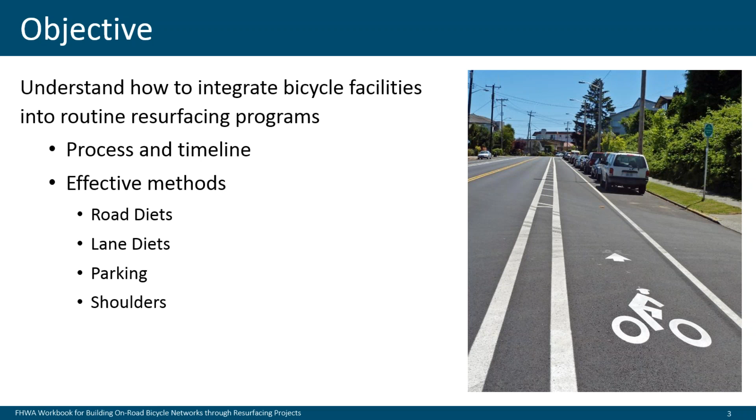In terms of the overall objective for our time today, we want to really get an understanding of how to integrate bicycle facilities into routine resurfacing programs. As was mentioned, quite often we don't always have funds to put in bike facilities as special projects. But whenever you do repavement, there's an opportunity to get bicycle facilities in simply because you have to do the restriping. So there's a couple different things we'll talk about today. I'm going to be focusing on the process and timeline, and then Jeremy will be talking about effective methods for actually implementing these different kinds of bike facilities.

So here's the agenda: the resurfacing process and timelines, which I'll cover. Jeremy will cover road diets and other methods for including bikeways, and then we're going to touch on cost and material considerations. I want to refer you to the lollipops on the right side, which works really well when we have in-person workshops. What I like to do is suggest you think of when you were 11 years old, and think of where you lived at that time. Were you allowed to walk alone and go to the grocery store or wherever and get a lollipop and come home alone?

Was that something you were able to experience as a child, around age 11? Now jump forward, and assume right now, wherever you live, that you have an 11-year-old. Would you allow your 11-year-old to walk to the store to get a lollipop, walking alone?

Quite often when I ask people to raise their hands, we find there's a real loss of kids' ability to navigate their neighborhoods and go to the store on their own. So it's a way of bringing home the importance of creating both bikeable and walkable communities. Think about it - does it pass the lollipop test?

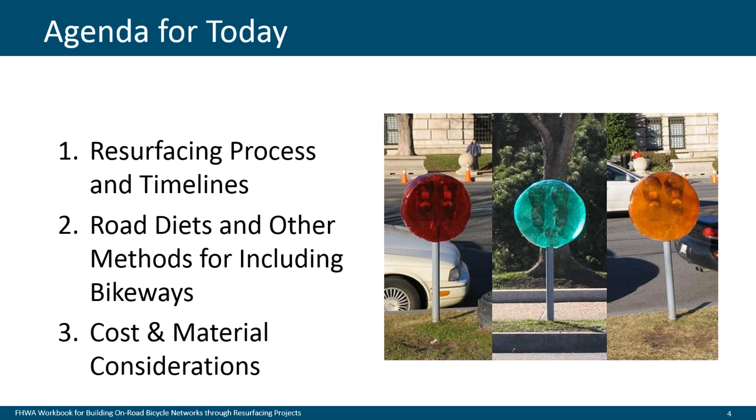So I'm going to talk about the process and timeline. In some ways, I think this is the most difficult part. We have a lot of good guidance on design and how to do things, and that's very important. But the process and timeline can be particularly challenging, especially since every community has a slightly different way of approaching it.

So we're going to take you through some steps that will hopefully allow you to figure it out for your community, and really start to institutionalize bike projects into resurfacing projects.

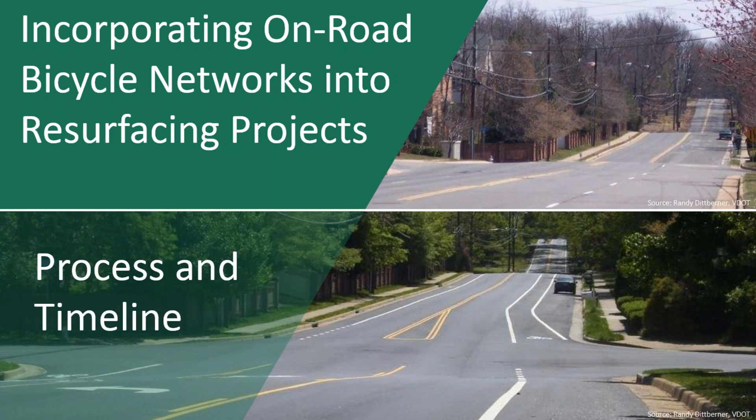Resurfacing defined is always a bit tricky, because there are so many new products out there - overlays, microsurfacing, new materials. So for purposes of our conversation today, we're going to describe resurfacing as anything you do to a street where, when you're done, you've got to repaint the lines. We'll keep it very simple like that.

We're also going to assume that the curbs don't move and the shoulders don't change - curb to curb, whatever's there gets resurfaced, but it means you're going to repaint it. And whenever you repaint a street, there's an opportunity to do something for bicycling.

Every community uses different definitions, and you'll have to provide your own in this. But for this presentation, I'm widely dividing resurfacing into two halves. One is operations and pavement maintenance - these are the annual programs where you typically do overlays and resurface streets. They're called different names, but you get the idea.

Then there are the capital projects - the six-year big capital projects where we're completely rebuilding a street, possibly widening it, maybe building a new street, with a whole different kind of timeline.

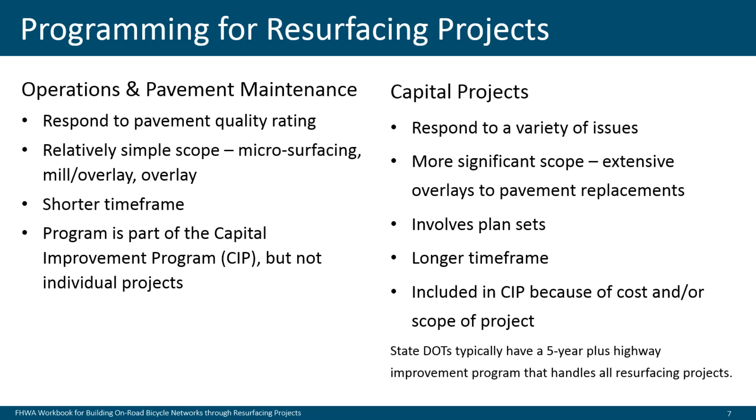We're not talking about capital projects today. Capital projects - we call them CIP, among other names. We're talking more about the operations and pavement maintenance, the things we typically do on an annual basis, putting a new surface on a street.

One thing that always comes up is what triggers ADA. I won't spend a lot of time on ADA this morning, but whenever you're doing a resurfacing through an area where people cross the street, it's going to trigger ADA. You'll have to redo the ramps and make sure you have the companion ramp and that it truly meets ADA requirements.

When communities get in trouble, it's usually because they're not being aggressive enough in meeting ADA requirements, trying to fine-tune what counts as official resurfacing versus what doesn't. Anytime you're putting a resurfacing down, however you define it, and repainting, you're going to trigger ADA. Just assume you're going to do this, and it's going to be part of what you do.

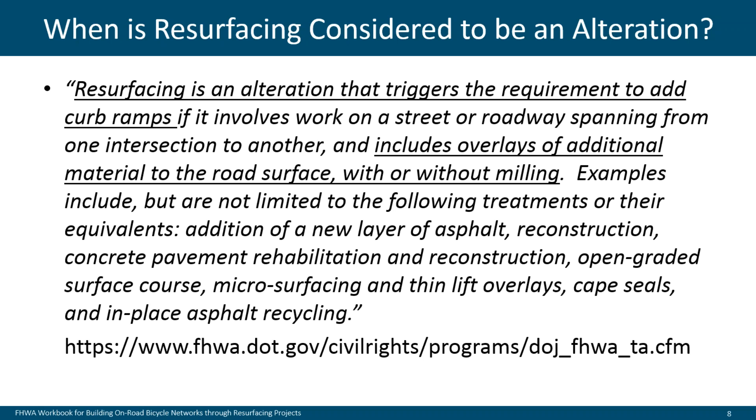So this is a typical process, and whenever I was working on this, whenever you start putting little boxes together and showing a process, you realize it probably doesn't exactly fit for any one community or transportation agency. But I think it gives you a sense of how this is done, and you'll have to adjust your thinking in terms of how your agency does this. But I think it's good for purposes of discussion and the point we're trying to make. So I'm just going to walk through this because I think this is particularly important.

Typically, there's some sort of inventory of road conditions, have some sort of asset management plan where we know the inventory and we'll have that data. A second piece here, the second box, starting on the left side going down, you'll have that information, process the data in some way, and use it to rate the streets. And then the third box is there's going to be a resurfacing list. It could be something that maybe you revise once a year or every couple of years, but at some point there's going to be a list, and there's going to be a number 1, number 2, et cetera, through the list. There may or may not be, you can see the sub box there, some agency review, and then it might get adjusted, and then obviously there's a final list.

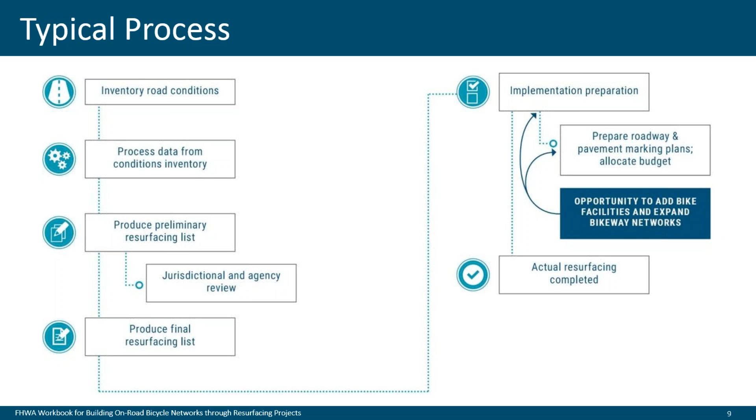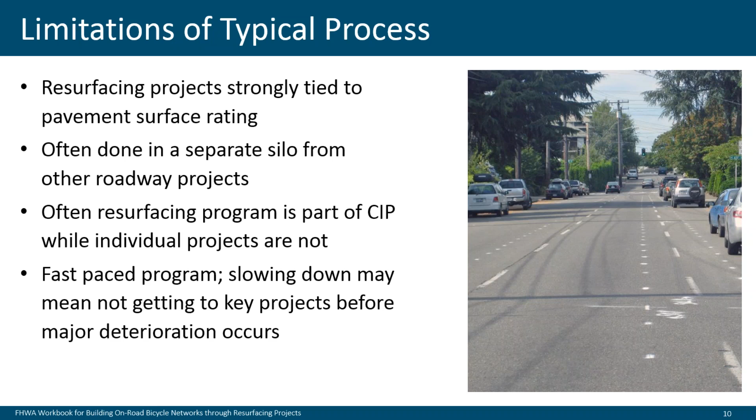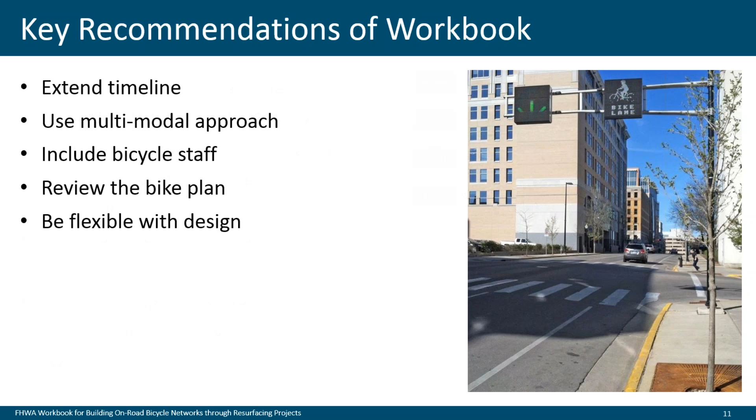So the recommendations of the workbook, and I'll have a slide on each one. We're going to talk about extended timeline, the use of multimodal approach, including bike staff, reviewing the bike plan, and be flexible with design. I'll have a slide on each one of these. So probably the most important

recommendation of the workbook is an extended timeline for the annual resurfacing projects. And what we're recommending is a 2-year cycle instead of a 1-year cycle. Now, obviously, if you move from a 1-year cycle to a 2-year cycle, the transition year, you're probably not going to put as much pavement down that first year. But once you're into the 2-year cycle, then obviously you do as much as before. And what this allows for is to involve the public. I'll talk a little bit more about that.

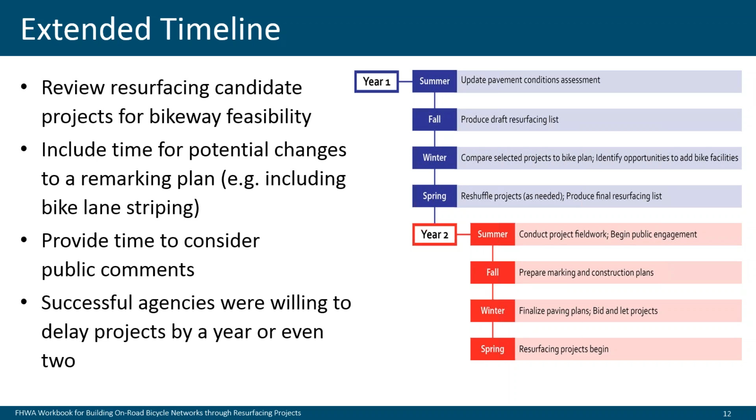It also allows for doing a new channelization plan, which is obviously required if you're going to put in bike facilities with the resurfacing. So one to two years out, that's probably one of the main recommendations.

We're also recommending a multimodal approach. What we mean is that even though the focus may be bike facilities, you want to make other improvements at the same time. The more multimodal it is, the more inclusive, and the more public support you'll generate, especially with walking improvements, since everyone walks, not everyone bikes.

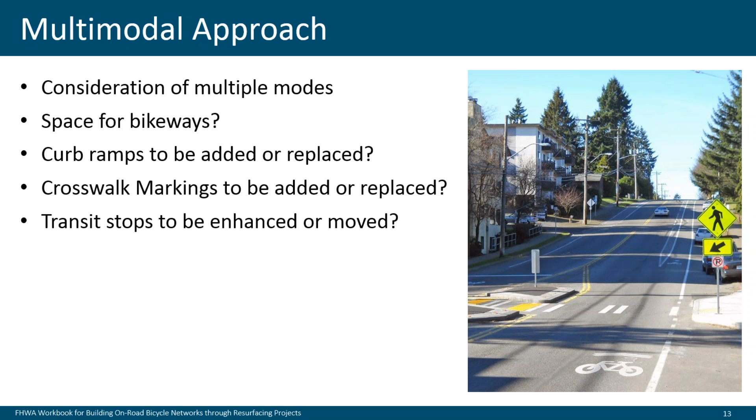This picture is a project I worked on, and if I give you Seattle examples, it's not because Seattle does it better than anybody else, it just happens to be where I live, so those are some of my stories. This is an example of a street with a road diet. It was a 4-lane road that went to 2 lanes with buffered bike lanes, as you can see. As part of the project, they put in a crossing island, and there happened to be senior housing in the area. By doing this, it generated a lot of support among the neighbors who needed to get across the street.

So just one example of the multimodal approach generating a broader base of support, including bike staff. This gets back to the silos - if you have bicycle staff, early on, for every project you're involved in, you want to have a meeting with them. Obviously you want to bring in pedestrian staff as well, could be the same person or someone else, but they'll be familiar with the bike plans and connections, both current and future.

I've worked with a lot of teams, and I've always found that early meetings, before things are fully scoped, bringing in all the different disciplines, you just get a better outcome for everyone involved. By starting early, you make sure you don't have this last-minute show-up, and then you've got issues with time and budget.

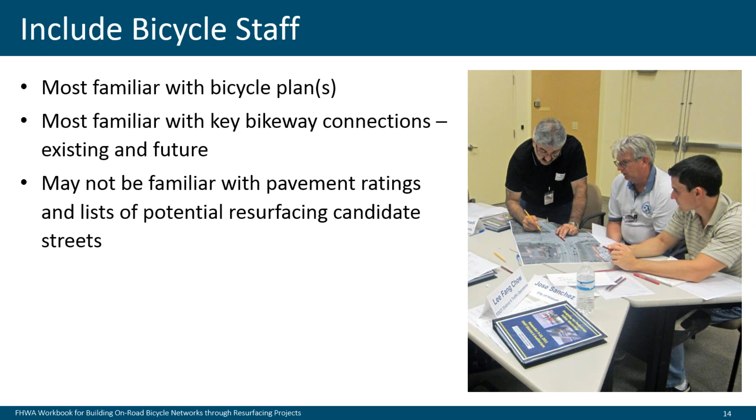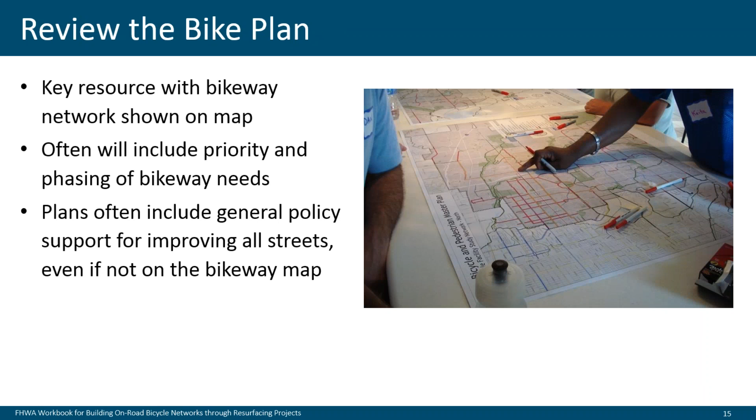This is also an endorsement for having a bike plan, because what you don't want is for every resurfacing project to have to figure out, is this an important bike street? If you have a plan with good maps showing proposed cross sections - this is where we want a buffered bike lane, for example - you already have that in place, making it much easier to go to the plan and say, okay, we've already figured this out, this is a really important street, or nope, this one's not as important, and have some direction on where you want to go. Usually you'll still have to review it and do some public involvement, but it really helps a lot and moves the process along.

This is one of my favorite books that FHWA just put out, called Achieving Multimodal Networks, and it really focuses on safety. What I really like about this book is it goes through and identifies all the institutional barriers that could exist to putting in bike facilities.

Things like road diets, lane diets, and all the things Jeremy is going to talk about in a bit. There's a lot of myths out there about what you may do, getting back to those keywords: you must, you may, you should, you could. What this workbook does is go through existing guidance - things FHWA, MUTCD, and different AASHTO guides have put out, plus interim guidance - and uses that to say you have permission from the national guidance to do this, this, this, and this.

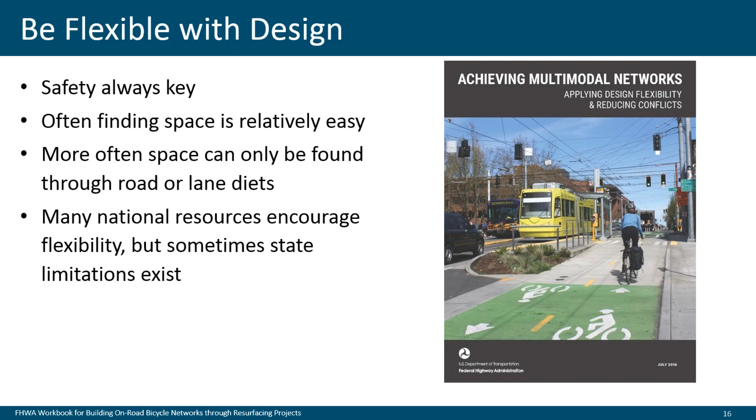So the topics in here were specifically chosen to address barriers we always run up against in doing some of this. And I think the word I like with this manual is permission - it gives permission to do a lot of things.

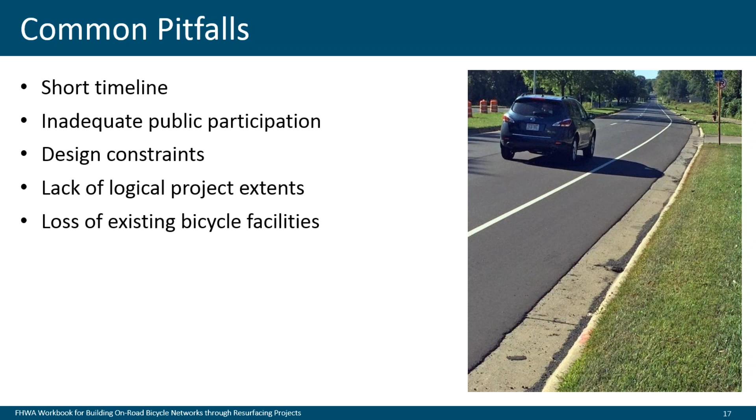So just recapping some of the common pitfalls of the one-year cycle: the short timeline, inadequate public participation, design constraints, not enough space, lack of logical project extents, where do you start and end the project, and the loss of existing facilities. I'll quickly go through each one of these.

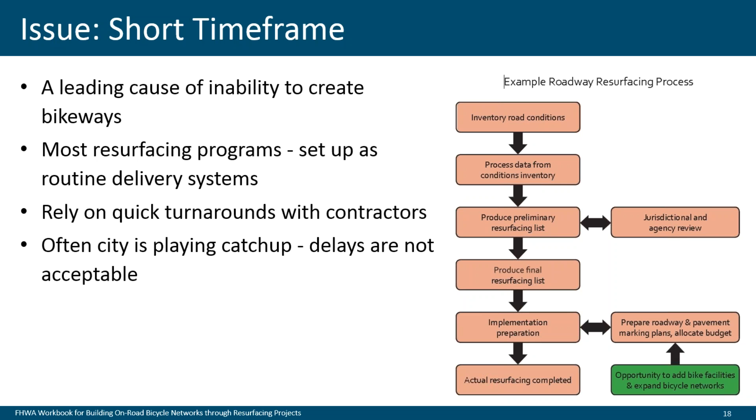Again, we talked about the time frame, and on the right is another version of what I showed you before, so I won't go through the whole thing again. But the quick time frame, the isolation, the silos, the quick turnaround—all those things are reasons why quite often we're unable to get bike facilities in on repaving; we haven't figured out a way to institutionalize it.

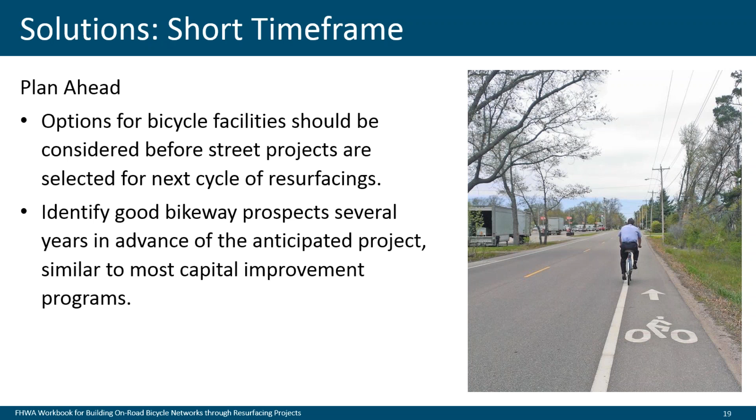So again, in terms of addressing the short time frame, the key is just planning ahead, going from one year to two years, and making sure we have a bike plan in place and that we use it, so we know exactly what's going to happen. I think the word 'plan ahead' really captures that well.

I'm actually going to push this a little further and suggest that some communities now, in terms of producing the list in the first place, go even earlier in the process, when they're doing the prioritization. Quite often when you're doing prioritization, one of the criteria is: is this an important roadway or street in the bike plan? And so the bike plan itself starts to influence the list.

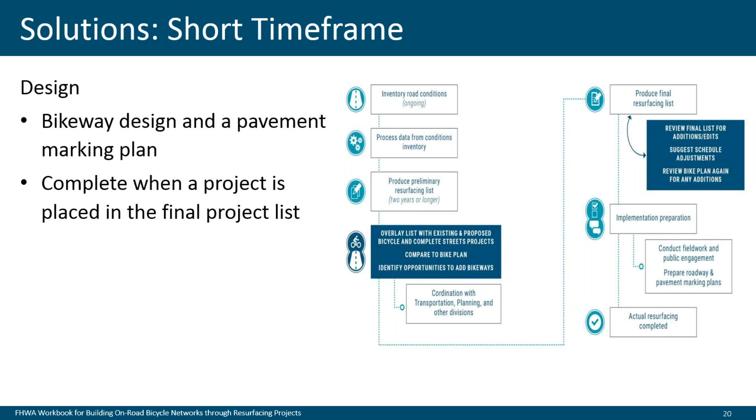Now, you don't want to overdo that. You certainly want to resurface those streets that really need resurfacing, but it's also a good idea—and a lot of communities have done this—where when you're doing the scoring and prioritization, you have your formula, and you allow the need for bike facilities to influence the list itself. But certainly, as soon as you have the list, early on, two years before you actually do the resurfacing, you need to start thinking about what bike facilities you want to incorporate into the resurfacing.

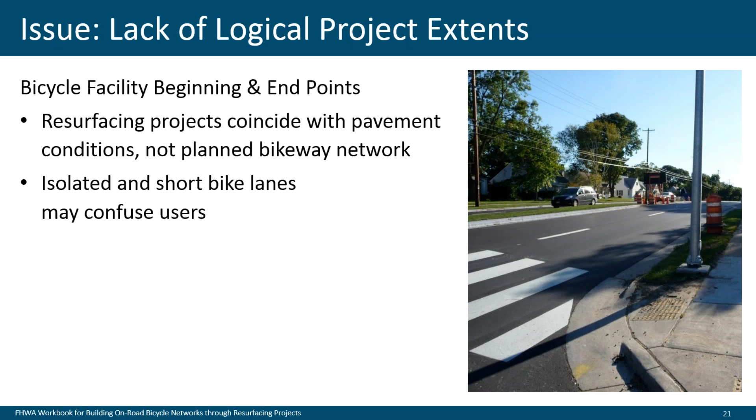Lack of logical project extents—that's a fancy way of saying sometimes it's hard to figure out a beginning and an end. One of the things we don't want to do is put people on a really nice bike facility, and all of a sudden you get to a spot where it ends, and fairly inexperienced cyclists find themselves in a situation where they're really uncomfortable because the road conditions change and the bike facility disappears.

So the key is to work ahead on this. I've worked with a lot of these over the years when I was with the city of Seattle. Sometimes there's not a problem—quite often there's a nearby bike facility you can provide signing to. So if the resurfacing project goes, say, one mile, maybe just a block or two short of that mile, you can provide some signing that directs you to another facility, maybe using a residential street connector or something like that, even temporary or interim.

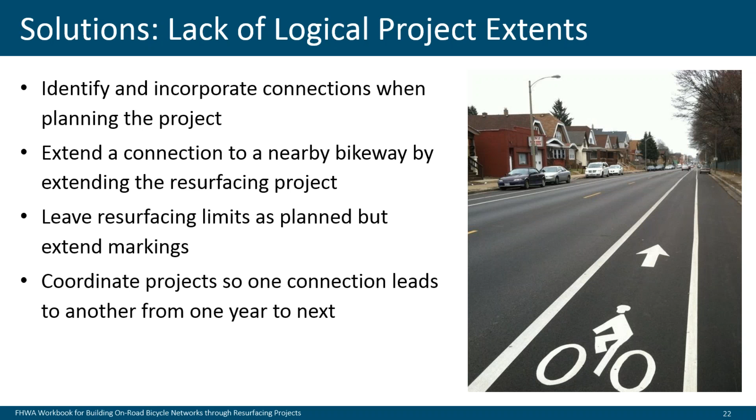The other thing I did quite often is shorten the resurfacing project a bit, or lengthen it, or coordinate it so that the second year a second piece is done. There are a lot of different ways to be creative about it, but what we're not recommending is that you simply don't do anything. A lot of times I think the signing and just planning ahead—that's why planning two years ahead is so important—because you don't want to leave people stranded, but at the same time you don't want to lose that opportunity.

Now, absolute worst case—I've done this—is you restripe the street so there's space for the bike lane, and then maybe add it a year later when the full project is put in, if there's like a two-part project or something like that.

And that can be done. Usually I would call that Plan B, but certainly that can be done.

So some design constraints. Obviously, when you're doing curb to curb, there's going to be challenges with the amount of space available. This is really why I think it's so important to use the workbook that I just referenced a little while ago, in looking at what you can do and what's recommended and maybe where you should be careful.

Jeremy will talk about this in just a couple minutes, about at the end here. He'll talk about that a lot more in terms of what permissions you have to, for example, reduce the width of lanes, that kind of thing, and what are the opportunities to work within this constraint of what you have.

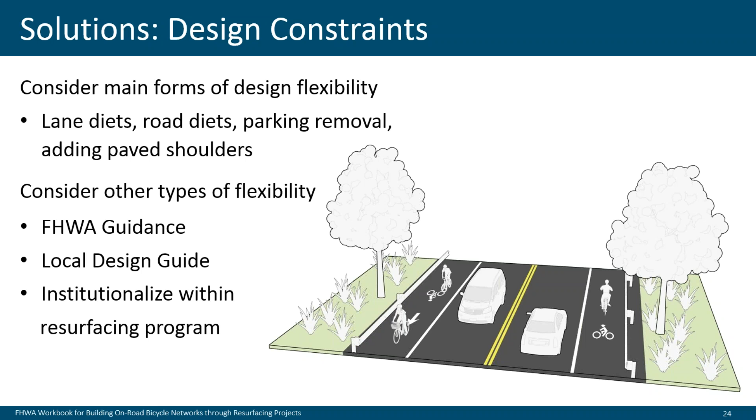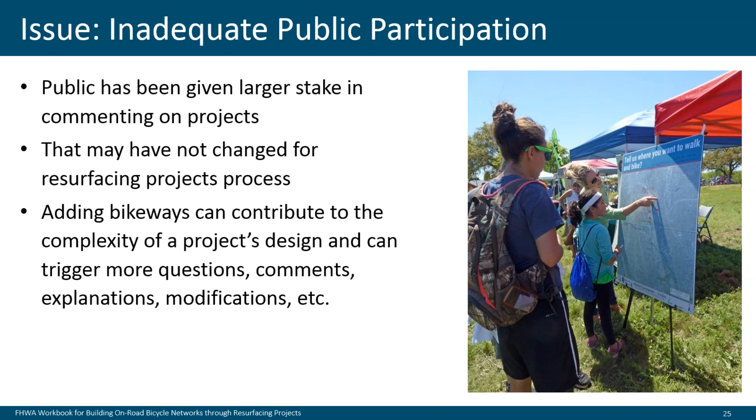Public participation. Obviously, if you're going to do a road diet and change the number of lanes, you're going to have to do more public process. And again, if you go from 1 year to 2 years, you're going to have the time that you need to talk about the complexity of the project and to get the public involved.

I think the key here on the road diet in particular is, people are going to be concerned about congestion. I'm not going to talk about that right here. Jeremy will talk a little bit more about that, but you really have to be prepared here to answer the questions, have good answers.

We have enough history on this now to have very, very good answers, and just be really thorough when you do the public outreach.

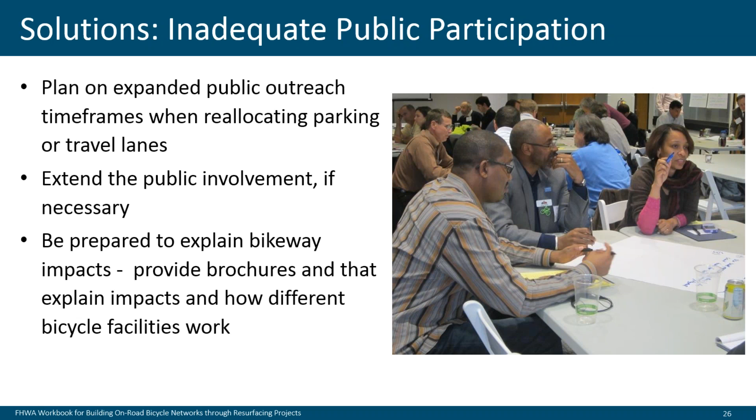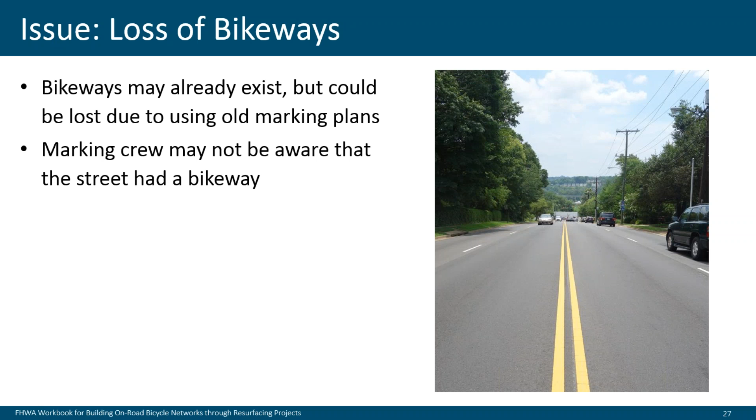So a contractor gets the channelization plan, repaves the street, puts it back exactly like what's on the channelization plan, not exactly what was out there.

So one of the things that I've always done on all these projects is check the channelization plan that goes to the contractor, make sure that it's the right one, and then once the resurfacing is done, go out in the street, check the little tick marks and make sure that where the lines are going are in the right place. It's amazing how often things just don't happen quite the way they're supposed to.

So just something to be aware of.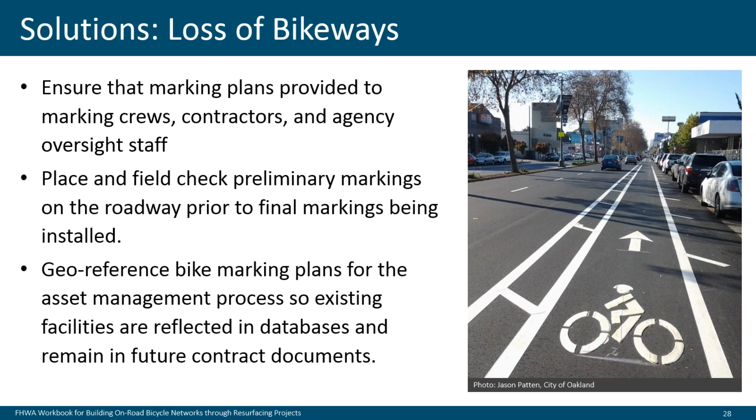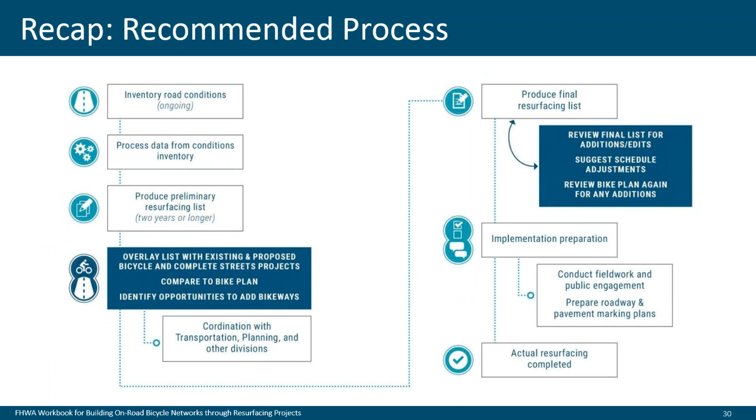What we're suggesting is to go to a 2-year process and get involved much earlier on, right in the beginning of the process, figure out what bike facilities you want to put in as part of resurfacing, and then again go from a 1-year timeline to a longer timeline. And that's it for my part.

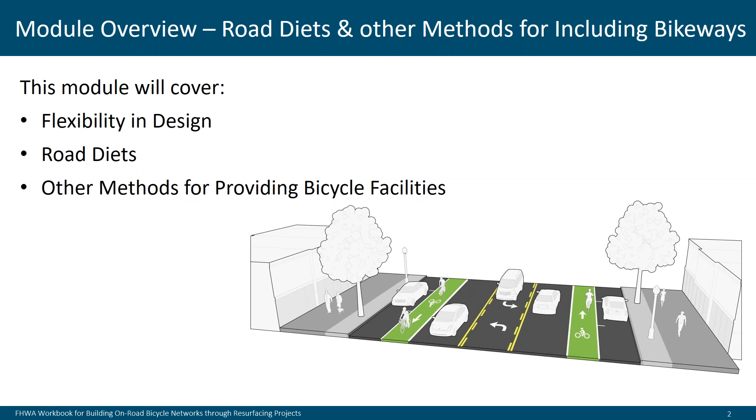Perfect. Thanks a lot, Dan and Pete. So yeah, I'm going to go over some basic concepts of road diets and other things that we can do once we get this incorporated in our process to incorporate bike lanes. So what I'll talk about is some of that flexibility in design that Pete alluded to, road diets as a whole, some other methods, and then I'll briefly touch on the costs and the cost benefits associated with pursuing this process over the traditional process that we're oftentimes following. Pete spoke briefly about this FHWA Achieving Multimodal Networks guide.

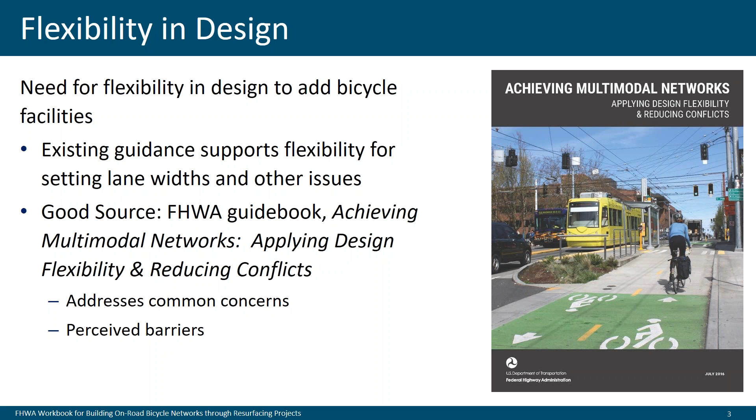This is a really incredible document that summarizes what the national guidelines actually say, as opposed to what we've always been taught that they said. So in order to develop this guide, we went through the AASHTO guide and other FHWA documents and really reread them to boil down this ability you have to implement narrower lanes and other types of lane configuration. In the workshops we've been doing around the country, we always conclude with actionable items, and more often than not, somebody raises their hand and says they didn't know about that Achieving Multimodal Networks guide and they're definitely going to read through it. If you're not familiar with it, I highly encourage you to download a copy for free and read through it.

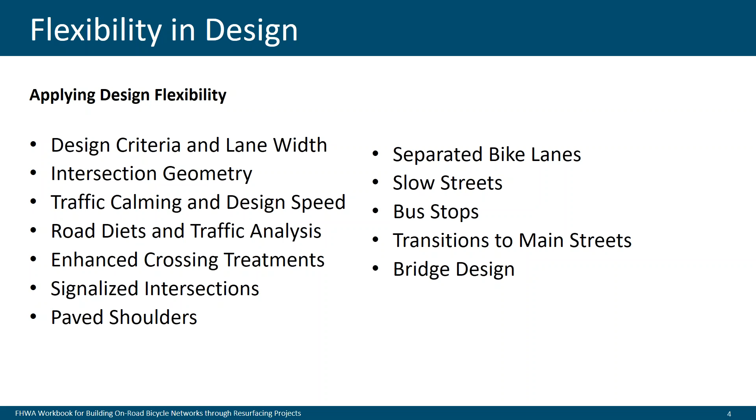The real highlights of it for me with regards to resurfacing are the ability to use different lane widths, the ability and options you have with regards to traffic calming and adjusting your speeds, some basic guidance on road diets and paved shoulders, and also some information on separated bike lanes, because we're always getting questions about design guidance for separated bike lanes and what document says that I'm allowed to do them. This kind of helps to boil some of that down for you.

Another area that's been identified as a place where you have flexibility is this memo from May 2016 from FHWA, changing the controlling criteria for lower speed roadway design. While that used to be 13 controlling criteria with regards to lane widths, shoulder widths, curb radius, and other things, the FHWA memo changes that controlling criteria from 13 to 10 for higher speed roadways. But where we're actually implementing bike facilities on these lower speed roads, those controlling criteria were reduced to 2 — one relating to structural capacity of bridges and the other relating to design speed.

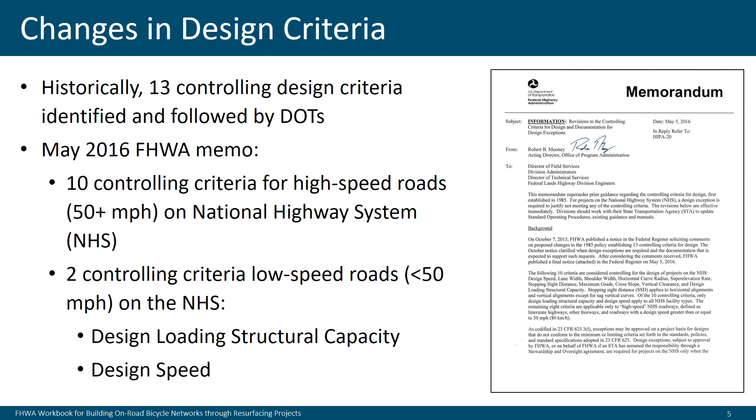So the federal government has weighed in and said you don't need design exceptions for narrower lanes. What really becomes the problem now is that a lot of our state requirements have codified some of these larger lane widths and rolled them into their design practices. So it's important to make our state and local officials aware that the federal government has said those aren't necessarily the appropriate widths for all conditions, and we need to take a closer look at how we're implementing lane widths.

As we look through other design guidance, the AASHTO Green Book, which is sort of the Bible for highway design, even it points to the fact that lane widths can be between 9 to 12 feet in width, and research has shown us that 10 and 11 foot lanes don't create a negative safety effect, and actually show significant benefit with regards to crash reduction. So being able to point to what the guiding documents actually say and using that to influence your decisions about different lane widths and configurations that you can implement on your roadways.

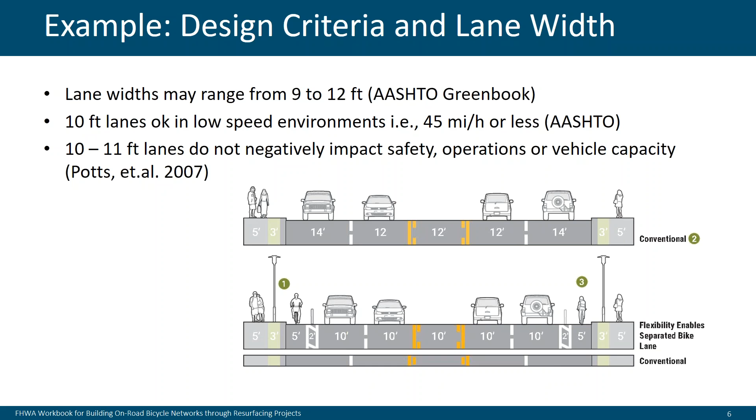One of the other myths is this cyclical adjustment of posted speed based on your design speed, and a lot of the older design documents talk about selecting design speeds 5 or 10 miles higher than your posted speed, which inevitably just encourages people to drive faster, and becomes this problematic cyclical approach. So the guidance documents now basically give you the ability to set your design speed and your posted speed as the same, while also understanding that you have the ability to get speeds down below your posted speeds through different treatments.

One of my favorite examples of this is things I see in places like Portland, Oregon or Philadelphia, where they will adjust their signal timings to provide 20-mile-an-hour green waves to encourage people to drive at a lower speed.

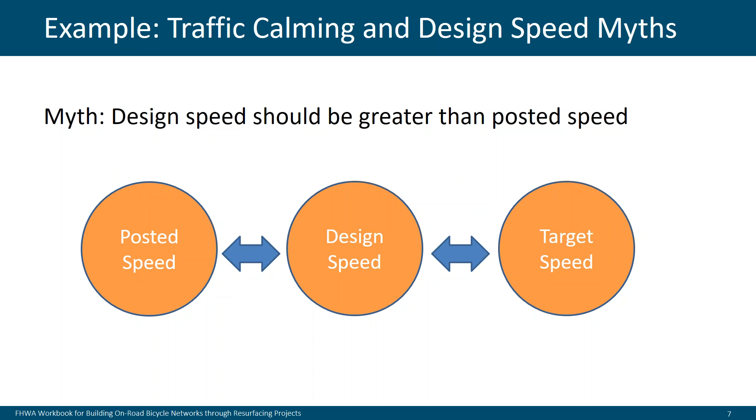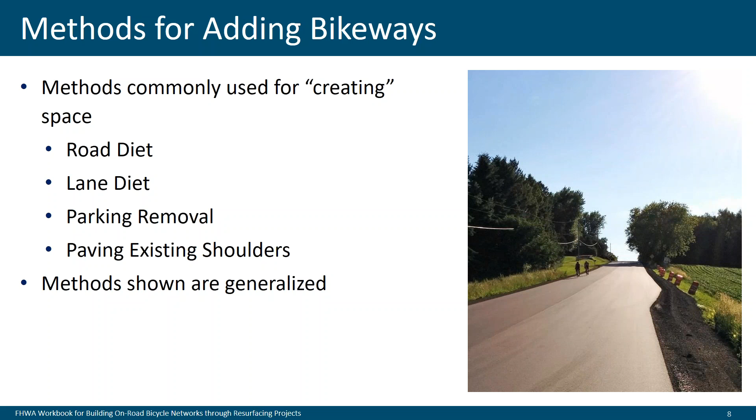I think we need to look at unique approaches to regulating speed, regardless of what the posted speed is, to encourage people to travel through a neighborhood at the speed we actually want them to go. In the workbook, we talk about different methods for including bikeways: road diets, lane diets, parking removal, and how we can better utilize existing shoulders already present along a roadway.

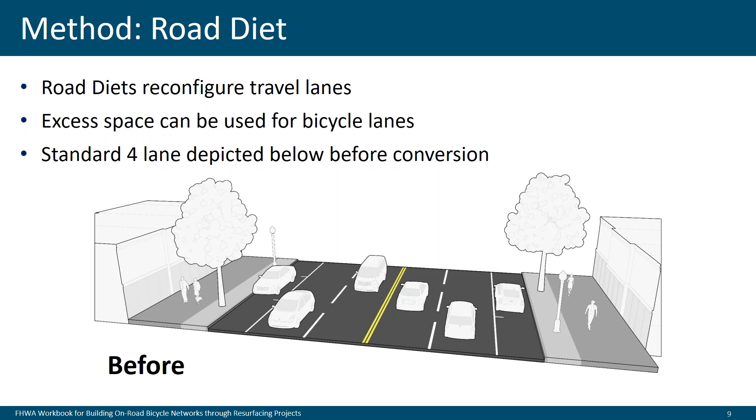Diving into the first one, road diets: this is where we reconfigure the number of travel lanes to carve out space for bicycle lanes. The example shown here is a typical 4-lane roadway with parking on each side. More often than not, we find these roadways have very generous widths. So if we reconfigure from 4 lanes to 3 travel lanes, just purging that one lane gives us enough space to create a bike lane on each side of the street.

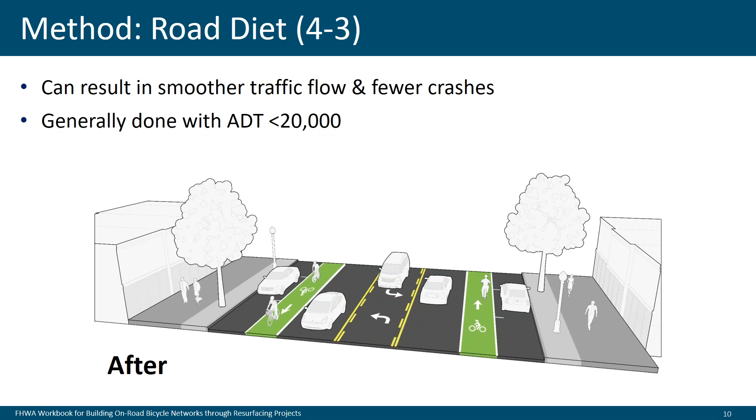What we generally find with these 4 to 3 conversions is that if your average daily traffic is at or below 20,000 vehicles, it's probably a perfect candidate for this type of implementation. If you look at other guidance documents, some local ones say as high as 25,000 ADT, and some as low as 18,000 ADT, but regardless, if you're in this approximate range of traffic, your road is probably a good candidate for a 4 to 3 conversion.

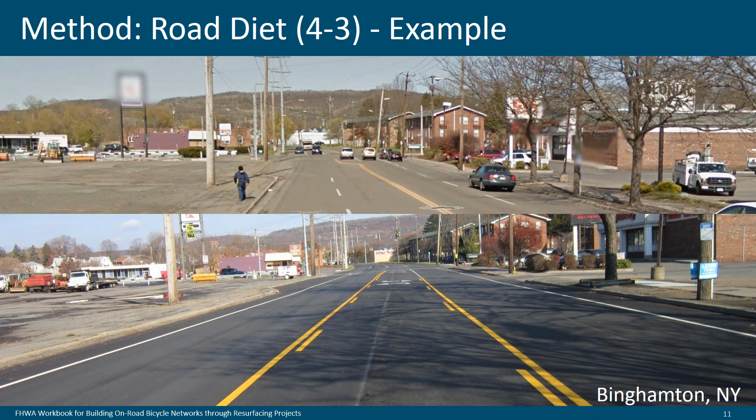So the highlights of the 4 to 3 conversion, that's our most popular implementation of road diets, but converting from 4 to 2 is another option — I'll get into that in a few moments. The ability to add that center turn lane is really the overarching benefit of the 4 to 3 conversion.

I'm sure you've all experienced it where you're driving down a 4-lane roadway and somebody stops in the leftmost lane to turn to access side streets or their driveway. Generally speaking, these 4-lane roadways with access points along them function more like 2 travel lanes, and you get people weaving back and forth trying to avoid those stopped vehicles making the turns.

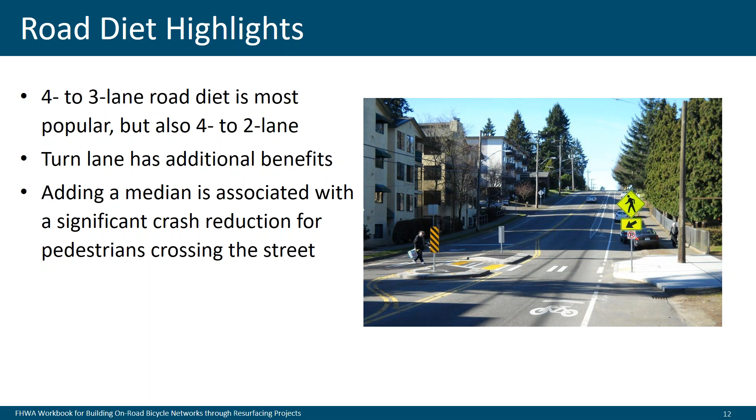You also have the ability to add medians, particularly in what's often referred to as that suicide lane, the center turn lane. Adding a median in that space at regular intervals could help reduce the frequency of somebody trying to pass someone, avoiding that other concern we sometimes hear with regards to road diets.

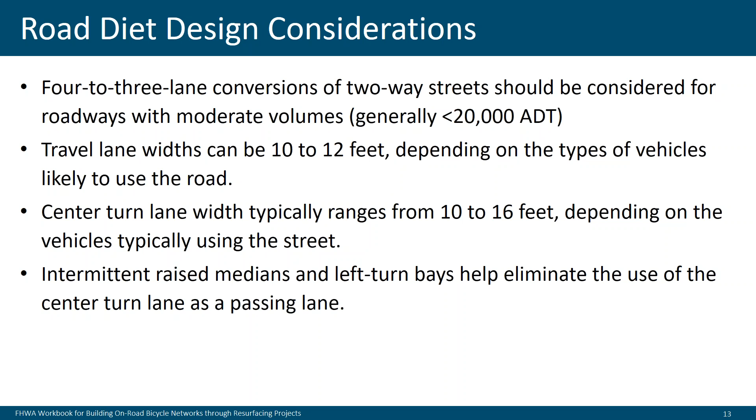So again, the general range of 20,000 is our trigger point. You can adjust your travel lanes in addition to removing lanes to carve out even more space. This might create the ability to do a buffered bike lane as opposed to a traditional bike lane. Generally, select lane widths that work for your particular corridor and your road users and vehicle types. The center lane width will often vary from 10 to 16 feet. I like to err on the narrower side, but there are instances based on speed and vehicle type where a wider width may be appropriate for your roadway characteristics.

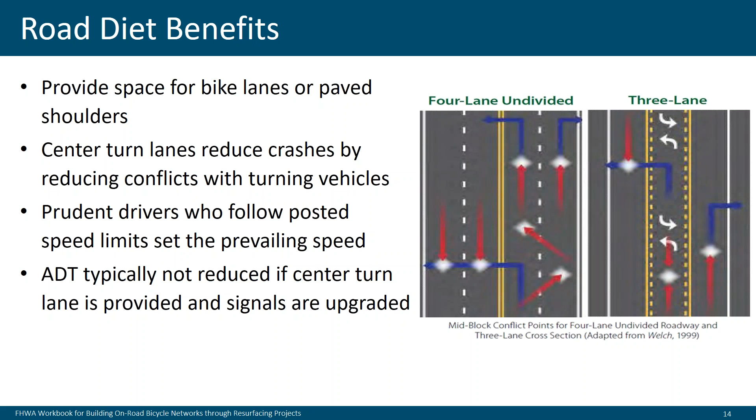As you can see in the graphic on the right, this illustrates the benefits we can gain from using a 4 to 3 conversion, because we reduce the number of conflicts that exist, and oftentimes the crash severity is also reduced. In addition, pedestrian benefits are pretty significant as well, because now the pedestrian isn't crossing two moving travel lanes, it's more like one. So we're often able to avoid the multiple threat we see for mid-block crossings and things of that nature.

So the challenge always is public involvement and engagement. One of my mentors always said that people love change as long as it's exactly the same when you put it back, and I think that holds true also for road diets. People like that there's a certain number of lanes out there, and have the perception that it might not function as well as it does today.

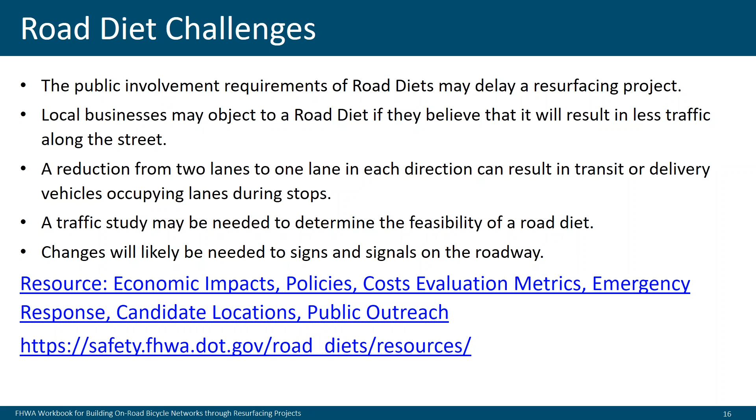Being aware that signal upgrades are often necessary when implementing a road diet, because you're shifting lanes, and in some instances your mast arms may already be of the appropriate length so you can shift the signal heads to the right location. But oftentimes there are signal upgrades that need to occur, so you should plan that as part of your cost estimation and planning process.

I mentioned before that sometimes we're able to do a 4-to-2 conversion, going down to only 2 travel lanes. This works well when you don't have a lot of left-turning vehicles and your ADTs are still very low. When you're able to find roadways that can accommodate these upgrades, it gives you a lot more space to implement protected bike lanes.

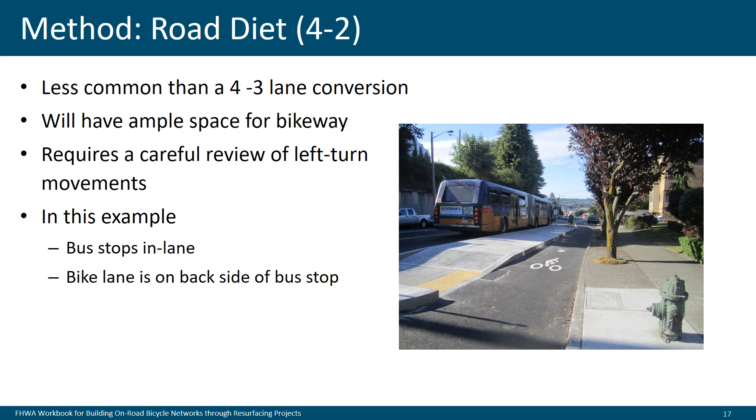Here in the photo, you're seeing a floating bus island and being able to create a separated bike lane behind that. So just looking for opportunities to carve out more space to create a lower stress bicycle network. Similar to the last example, you have a 4-lane roadway with parking on each side, and you're able to carve out a little more space to create that separated bike lane with 2 travel lanes, all while still maintaining parking along your roadway.

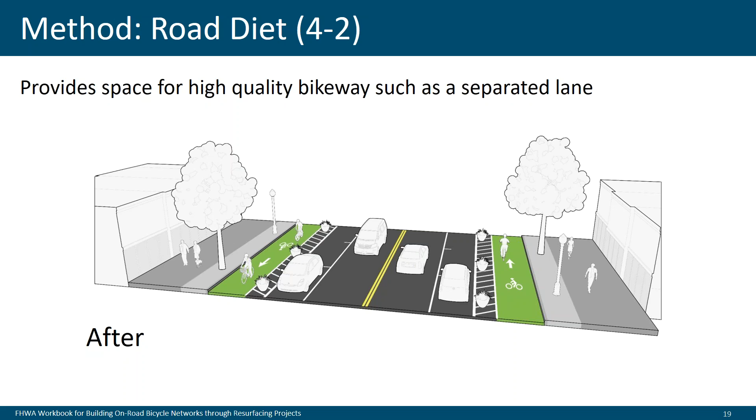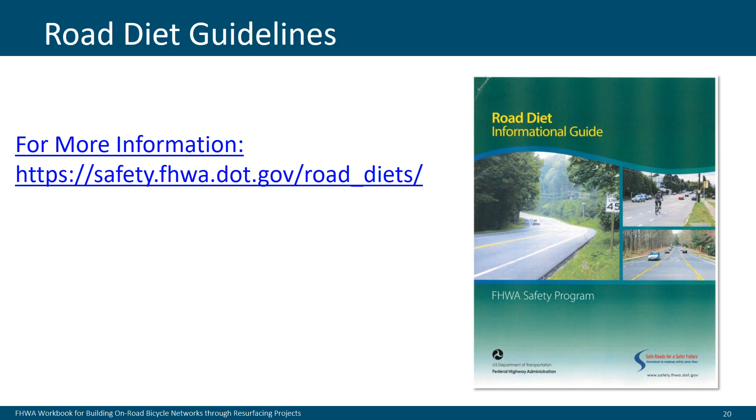I'd mentioned this before - reference back to the FHWA road diet guidelines. It will provide you a lot of information with regards to ADTs and widths and what's applicable when. That's one of those guides I like to go back to anytime there's a question related to road diets. And in addition to the federal guidelines, there are a bunch of states that have implemented their own road diet guidelines with additional information. I'd encourage you, even if these aren't your states, to at least flip through them and become familiar with what other states are doing. It may help influence some of the decisions you're making on your roadways.

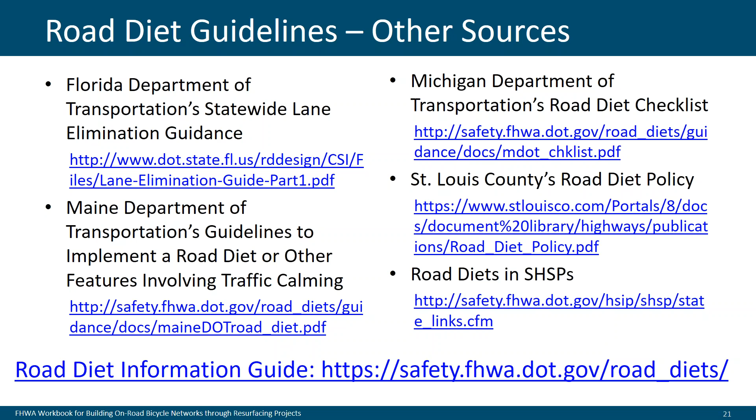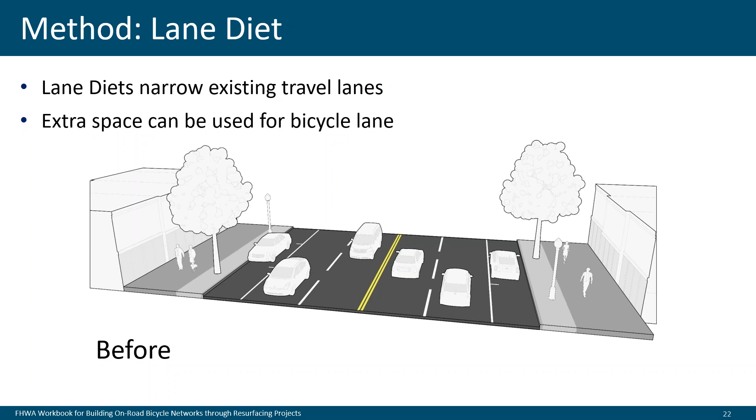And then lane diets, where we keep the same number of travel lanes but narrow the widths to carve out enough space for bike lanes. So imagine 4 travel lanes, each 12 feet wide, with 8 foot parking on both sides. If you narrow those lanes down to 10 feet and narrow your parking from 8 to 7, that gives you enough space to do 5 foot bike lanes on each side of the road.

You're not always going to have those particular widths, and sometimes you may only find that you can narrow up those lanes enough to create a bike facility on one side of the road while still maintaining vehicular capacity and parking. I encourage you in those situations to consider adding that single bike lane if it makes sense in completing your bicycle network, and then look for other opportunities on parallel streets to provide a sister bike lane that would accommodate a lower stress environment in the opposite direction.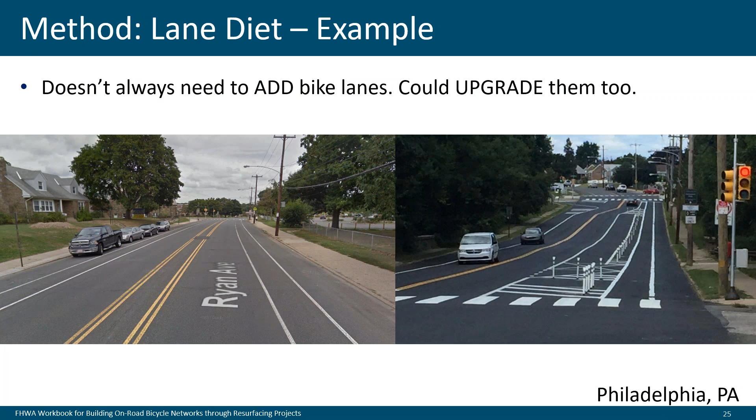So the benefits of the lane diet: one, it's great traffic calming. Anytime you're narrowing up the lanes, it becomes a little harder, a little less comfortable for somebody to try and drive at a faster speed. We see safety benefits associated with people driving at the speeds that you wanted them to drive at, or had designed for them to drive at.

We find that narrowing up the lanes is associated with a lower crash frequency. So not only is there a speed benefit of vehicles traveling at lower speeds, but we're seeing that the frequency of crashes is also going down with the implementation of a lane diet.

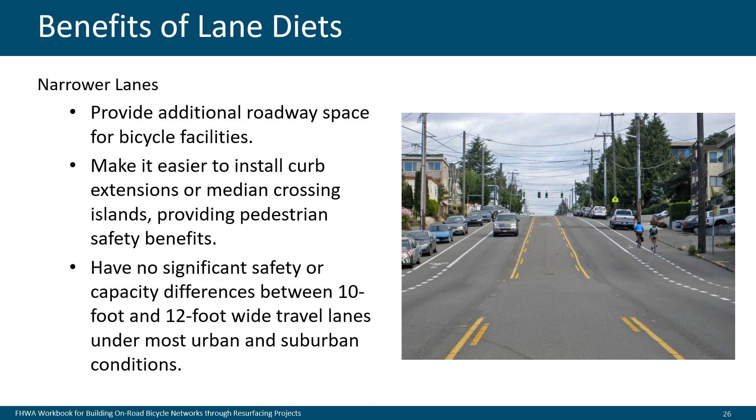So the considerations: it's important to show local officials that policy has changed at the federal level. While they may have an idea that lanes need to be 12 or 14 feet in width, make them aware that the guidelines actually give you the flexibility to select lane widths that are appropriate for your environment. Also point back to the AASHTO guide, which talks about 10-foot lanes being appropriate, with 11-foot lanes being appropriate if you have high truck traffic, buses, or larger vehicles using it with a significant level of frequency.

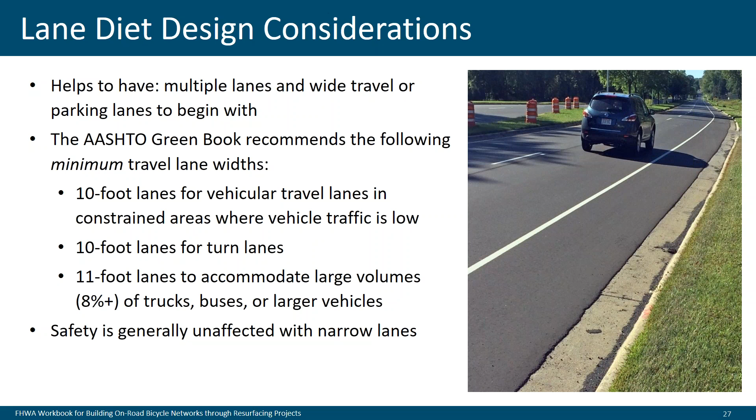Touching on some of those same points, make sure you're influencing the decisions that your state and local officials are making, particularly when they're updating their design policies. Oftentimes they're reverting back to what the federal government had said and using that to guide their decisions, so make them aware that the guidelines themselves have changed. Make sure you know the standards when you're speaking with the public, and know what the benefits, economic and safety, are with regards to lane diets and road diets, and be able to speak to those benefits when engaging with officials.

Probably the most contentious, or at least controversial, of the various options is the removal of parking. So you might not want to remove parking as your first project to implement bicycle facilities. We don't want to create any backlash with regards to implementing bicycle facilities, but there are ample opportunities to remove parking to create a more multimodal network without negatively affecting the ability for those who drive to find parking. Look for opportunities where parking is underutilized or lightly utilized, and do an assessment of what the available parking is in your particular project area or jurisdiction.

Oftentimes you can get some of this information from your parking authorities or from other studies that have been done, but being aware of how much actual parking is available when trying to have the conversation about eliminating parking to accommodate bike lanes. So in this example, we have a travel lane in each direction, two parking lanes, and by eliminating one parking lane and narrowing up those lane widths a little bit, we're able to carve out enough space for a bike lane in both directions.

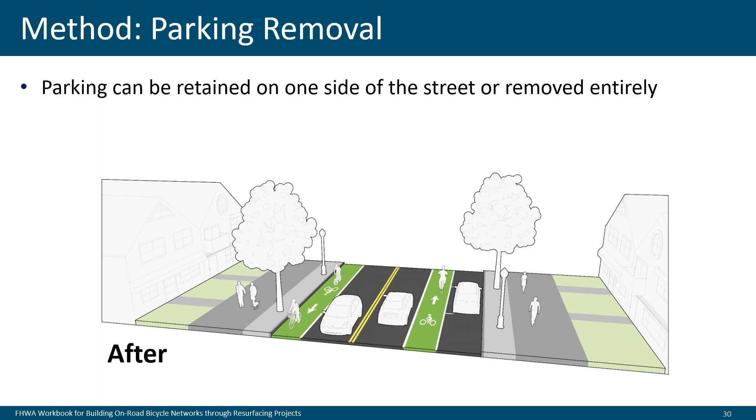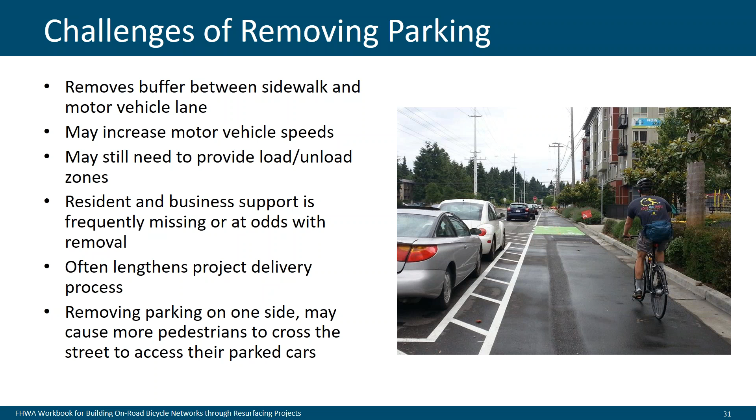The public engagement piece of removing parking is the most challenging aspect of it, but realizing that there's often available parking on those adjacent side streets or in off-street lots to accommodate the needs of all the different users. Make sure you have that information on hand when speaking with your business and property owners along the project.

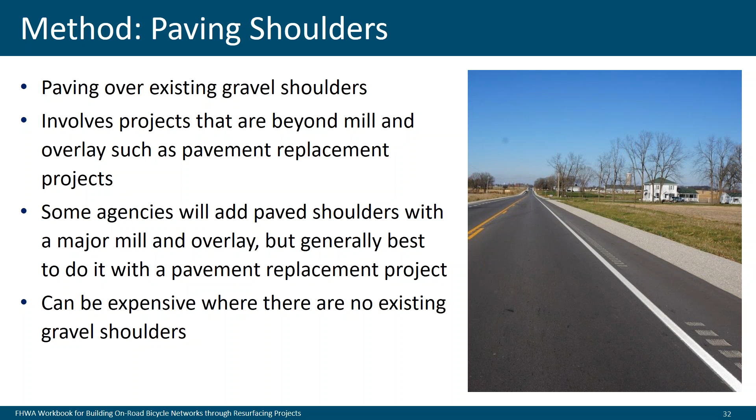And the last method is paving shoulders. Oftentimes you have existing gravel shoulders that might have a sufficient subbase to accommodate the loading of vehicles. So simply by adding the asphalt atop that gravel base, you might be able to widen the functional width of your edge-to-edge roadway. Done in conjunction with some lane diets, you might be able to create enough space that will function well for accommodating bicyclists in a more rural environment, where we'd rather be able to provide them enough space to function within the shoulder area.

Some other benefits, in addition to finding a space to accommodate bicyclists, when you pave your shoulders it will often increase the life of your pavement. You don't end up with that edge crumbling that you often see on a narrower paved roadway, reducing the frequency at which you need to go out and do additional maintenance.

I just experienced this yesterday driving through Delaware. The ability to accommodate agricultural equipment, maintenance vehicles, and if you live in an area with Amish, people in horse-drawn buggies. I saw that being used significantly, specifically for those users, as well as a few bicyclists, so also understanding that this can have a benefit for all the different users of your roadway.

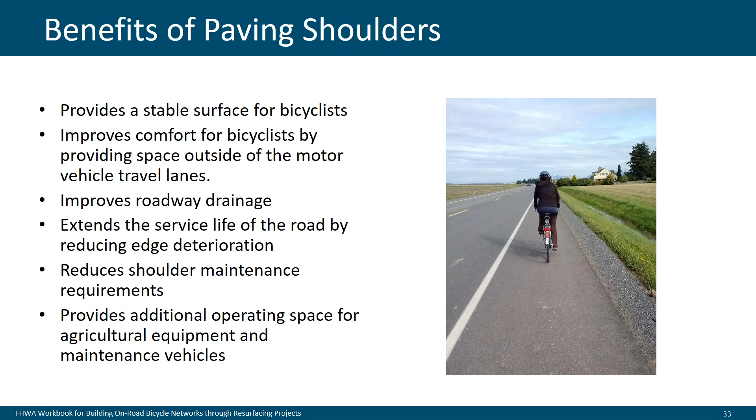The last thing I'll touch on is some basic information on cost and materials. We find that there is considerable cost savings when incorporating bike lanes into your resurfacing program, as opposed to trying to go back later and retrofit it in with eradication and new markings, to the point where it could cost as little as a third of the overall cost compared to rolling it into your resurfacing project. Really, it's one of those instances where we're trying to be the best stewards of the taxpayer dollar.

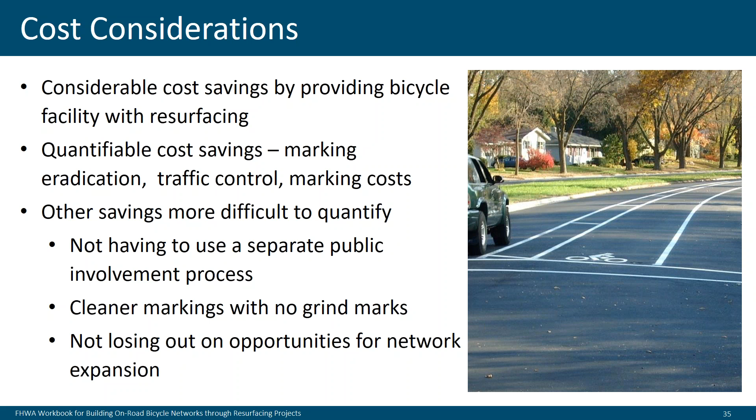So as a taxpayer, taking my engineering hat off, when I see a roadway repaved and striped, and then a year later I see them out there grinding out markings and putting something else down, I think that is a really challenging thing for the public to understand — that there was this process to try and incorporate the bike lanes, and it didn't work in the repaving program. By changing the way we approach the repaving program to incorporate these facilities into it, the public is going to see that as a better use of their taxpayer dollars.

Understand when selecting material types that you're picking the appropriate materials for durability and retroreflectivity. Are there concerns about slippery surfaces? Every agency has sort of defined policies on which markings to use on asphalt versus concrete, and I'd encourage you to revert back to those, as well as assess whether they're appropriate for your specific use. One example with regard to durability: if all of your markings are typically thermoplastic, but now you're creating an environment where no vehicular loads are going over certain lane lines, does it necessarily make sense to put back a really high quality, durable material that isn't going to experience a lot of vehicular loading?

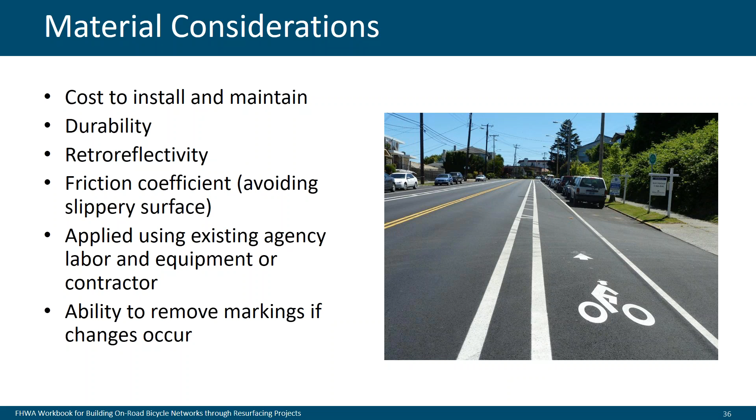So select the material that's appropriate for your specific use. I'd point you to the NCHRP Synthesis 306, where they boil down the pros and cons of each of the different marking materials, as well as the costs associated with them — thermoplastic being the most durable but also the most expensive, and traditional paint being the lower cost option, but you'll have to go out and repaint it more frequently. I'd point you to that resource to get more information, do the cost-benefit analysis for your specific locations, and make your selection accordingly.

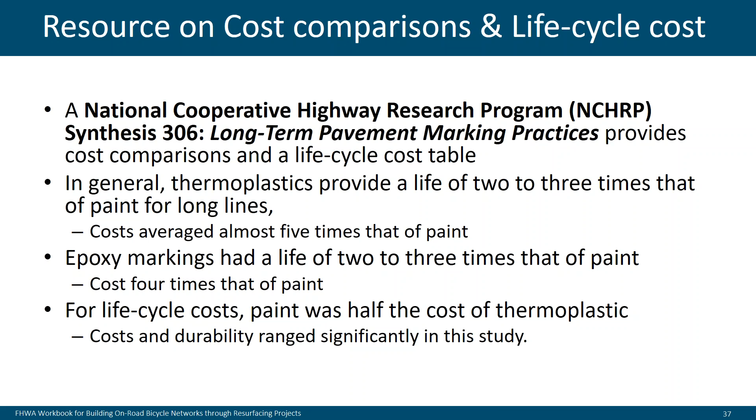And with that, I think we'll move it to questions.